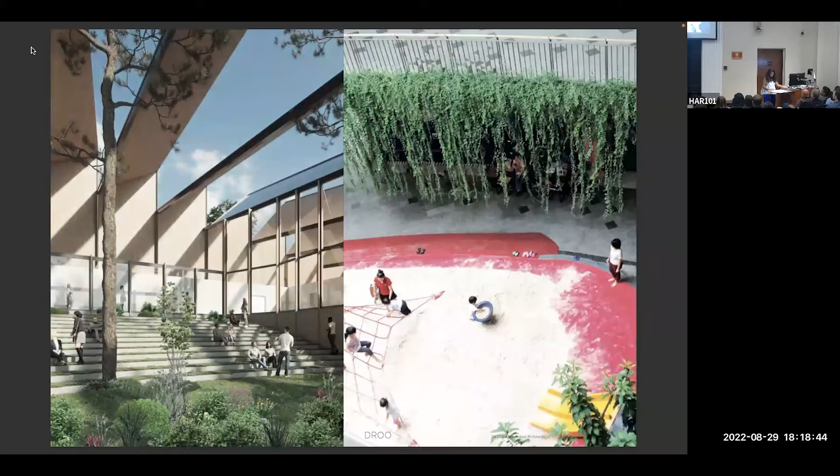What drives us is a critical pursuit of a shared cultural contribution to produce work which innovates, is intrinsically participative in the narrative arc of the history of a place, and history full stop. There are themes which resurface: cultural referencing, spatial and typological economy of means, material research, a fascination for the thickness of walls and envelopes, and a process of co-authoring. But no two projects follow the same route.

Almost all of our work is in cities, and somehow most of it is in complex or contentious situations, a sort of creative friction. Cities which are oscillating between rapid change and preservation, those which are struggling to house their growing populations, and are characterized by both extreme wealth and extreme poverty, sometimes only streets apart, sometimes within the same buildings.

Cities where often the hard truths are wrapped in multiple layers of relative truths at the scale of a handful of streets, between neighbors and communities, between households and families, between the powers of commercial growth and the history of a place. And it is through the subjective truths that we engage with the hard ones. The ugly plan is an analogy for a project which critically synthesizes the conflicting needs of context, but acts beyond circumstance.

This is an ugly plan. This square, the Campiello Morosini, is an ugly plan shaped by its relativism. It is more than one square. It has been co-authored through time by accumulated conditions. Each intervention had its own identity. Every gesture was strong and important, and yet each gesture worked in coherence with its predecessor, like a chess game.

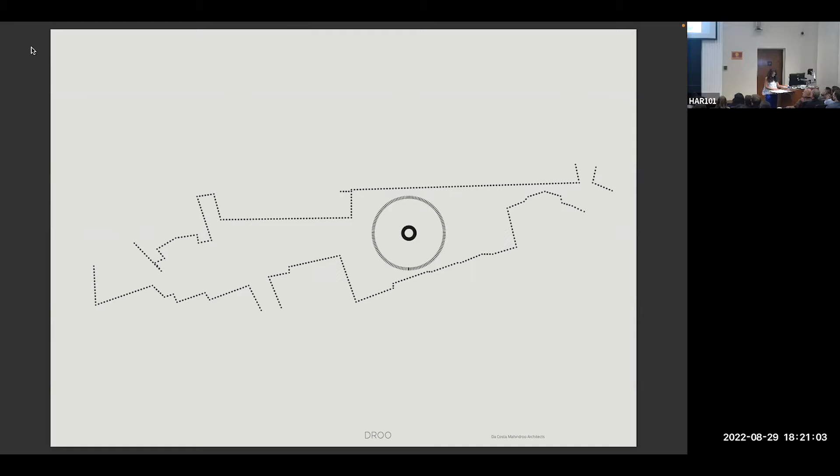It is many versions of itself, depending on which vantage point it is experienced from, and more importantly, it is whole and extraordinary at every scale of experience. It is the ugly that we endeavor to in our work. Projects which can't be isolated from their intangible or physical context, but it's not to be awkward. It's because engaging with the strata that make up the cities that we've been working in, it is near impossible to create an absolute or autonomous work. All of our work is a conceptual point of departure, which remains open to its own multiplicities.

Students, like many of you, aren't a simple social category. We see them as complex, diverse individuals who have their own quirks and some baggage. Despite growing financial challenges, we increasingly see students breaking away from the linear timelines of education and then employment to pursue creative endeavors during their studies. And so more than a test bed, we saw that student housing was a space to nurture these opportunities, to try, test, and accept to fail within the comfort of your home. An ecosystem of reuse, co-op employment, associative activism, NGOs, or even small businesses.

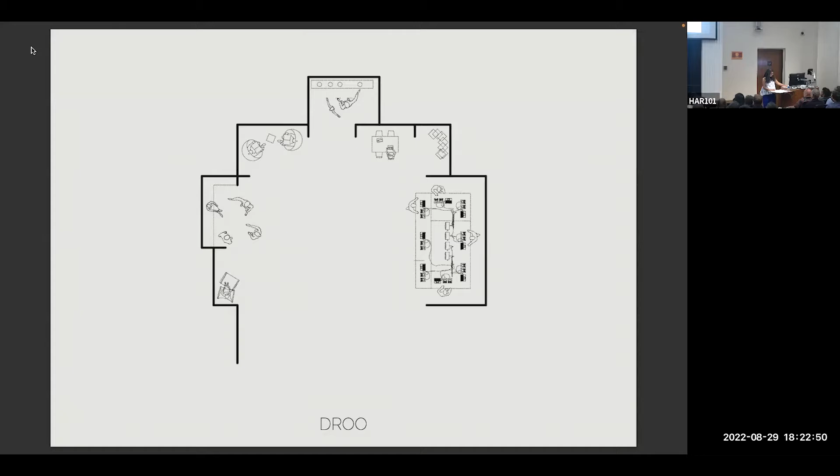Ideas are often developed in the corners of a room, in the spaces which allow for the improbable encounter of the extrovert and the introvert, where an experiment can remain undisturbed for a number of days or even months. Ideas build up in the recesses, in the corridors or thresholds, and gather informally over time. There is a circular economy to students moving through housing year after year. They hand down old tech, bike parts, clothing, furniture, and share knowledge.

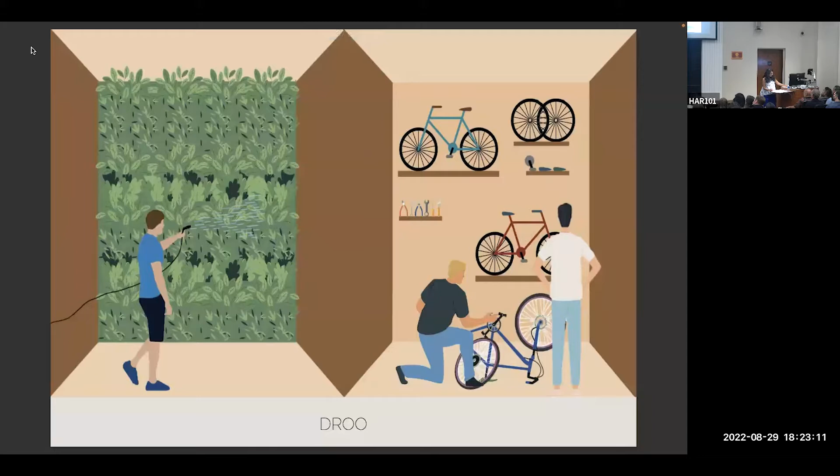We saw the common space as a large market hall of individual alcoves to conceive, make, create, and display. A bike repair shop or a co-op fruit and veg market, maker spaces for shared classes and learning, an articulated frame around student-run projects. The alcove exists as a threshold condition between the communal and the private, equally applicable to the market as it is to the apartment.

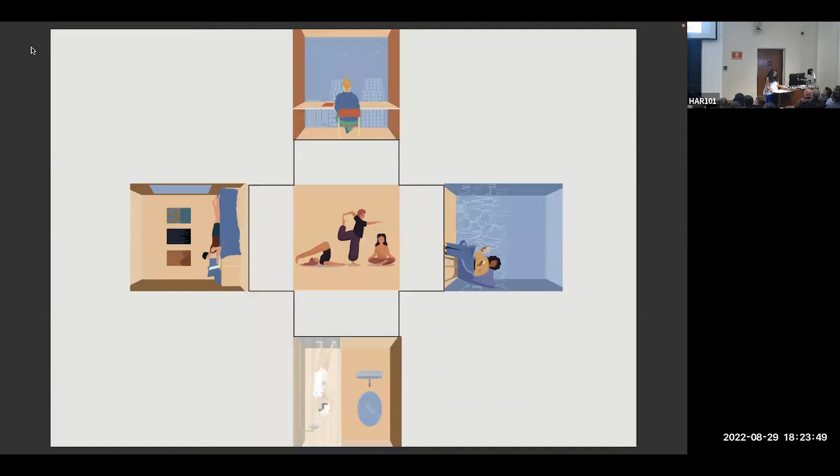The brief required apartments to have a 13 square metre room with an ensuite, or 140 square feet. We envisaged 13 square metres made of personal nooks for individual purposes, a space of one's own, alcoves which foster the freedom to change and adapt, to create more undefined space which allows you to think, stretch, dance, sprawl, and create. Malleable in proportion, these rooms aggregate as modules, pooling spaces to gently nudge a sense of communality.

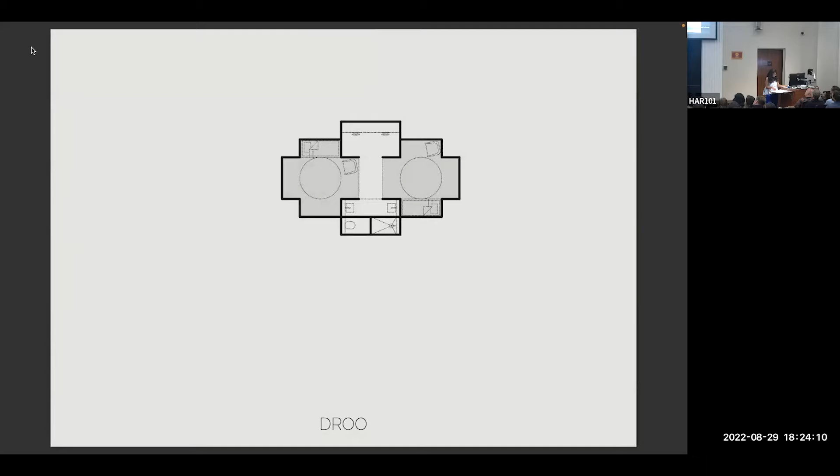Modules cluster to form buffer space, an inclusive space for people with different social skills, offering adaptability, informality, and inclusion. Creating an apartment that offers rooms within rooms, alcoves, nodes, and knuckles of opportunity. Spaces which foster habits which affect systemic changes, sharing of goods, prioritizing well-being and mental health. As walls thicken to meet the highest sustainability standards for passive design, we often explore the opportunities this depth presents in a number of our projects, which takes me to Paintworks.

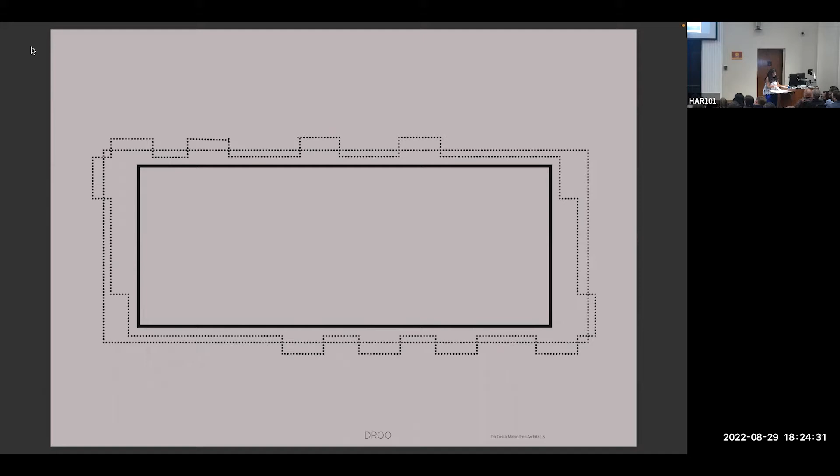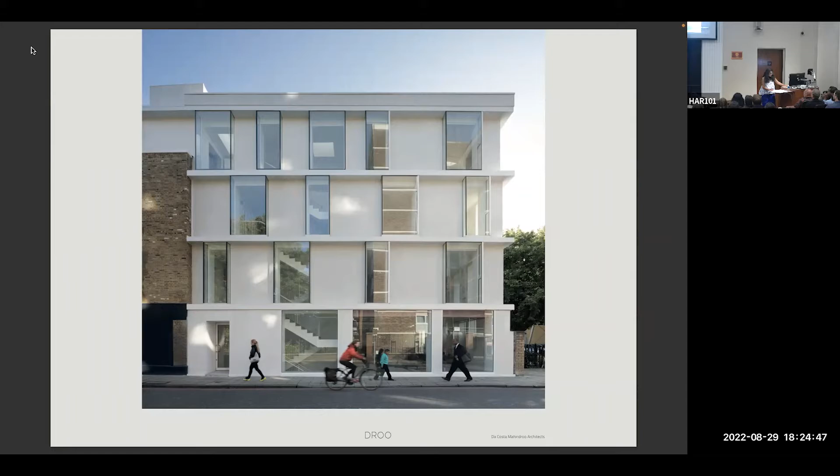Paintworks instrumentalized its context and a series of commercial accidents through robust opportunism to create help to buy housing that goes beyond the metric needs of development. The site was an existing warehouse with a car park behind it, something that I've seen quite a bit of here in LA as well.

The existing building needed an extension to be viable, and the question was which way: up, down, sideways into the car park. Effectively, for the developer, it was all of the above, and therefore it forced us into a project where we were negotiating with multiple uses at a compact scale, but also multiple neighbours, and this very pretty garden, which we borrowed from Hackney College. Our work became a game of who came first.

A quick word on planning permits in the UK. Planning in the UK is based on time and precedence. There is a rule book, a rough code, but most of it is a negotiation. Effectively, the game is to acquire rights that set precedents in terms of space, or use. This logic is combined with notions of light and privacy, but I'll come back to that later.

When you place even one window across this boundary here, we're effectively carving into the value of our neighbours' property, which means that we're taking away space that they can develop in the future. Why is this important? Because in absolute terms, this facade would have been entirely blind. However, for the benefit of the residents, we negotiated to limit Hackney College's right to future development by putting windows along this planted car park.

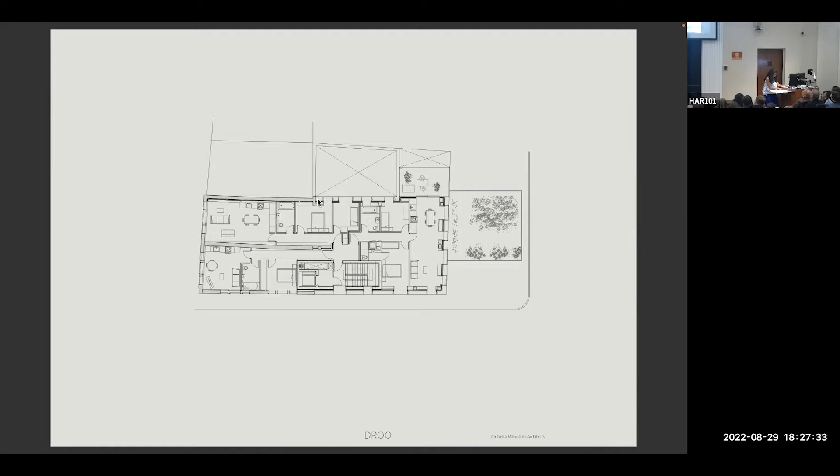Halfway through construction, the supermarket pulled out of their tenancy. This happens all the time. They had found a better deal elsewhere. However, the core was now built in its particular location with a lift shaft and windows already in place on the street. This commercial accident resulted in a particular communal gain with a well-lit and airy circulation space for housing, which now doubles as communal space where residents occasionally gather.

The result is a communal area which benefits residents and also frames the surrounding city, providing vistas into the gardens of the neighbouring social housing block, a strategic access to borrowed green. The challenge to an evolving and intangible volume is that the architectonics tend to emerge at another scale, usually a smaller scale, and in most of our work in housing, this is in the thickness of the facade or in the windows, the threshold that we delight the most in designing.

The proximity of all of the neighbouring properties meant that there was an inevitability of privacy issues to address. In order to address passive design, we increasingly see building envelopes become thicker with double insulation packages, absorbing structure, MEP, services, fire curtains, barriers, and blinds. The thickness presented an opportunity to create a double-layered internal space within the windows.

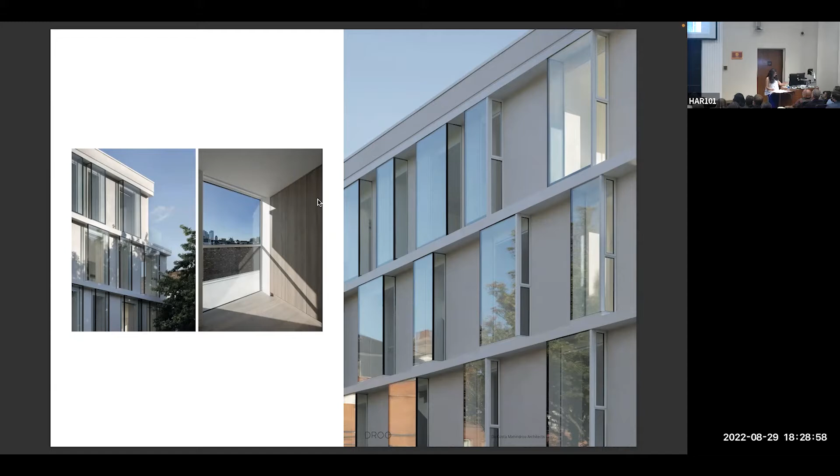The large-scale slab-to-slab windows let in light and frame dramatic views across the city. The alcove that they create, which they extend to the slab boundary, creates a sense of privacy and actually offsets some of the heat gain. The windows hang like picture boxes onto the cinema that is the city, whilst creating an intimate and individual scale of the experience within the alcove.

The very idea of time and continuity informs a lot of our work and a lot of our efforts to source and reuse materials. The rain screen is made of a recycled stone and resin compound with concrete building waste mixed in. It has a crumpled paper texture as a nod to the history of the building as the Paintworks, which was a former artist supplies warehouse.

We've been working on building waste composites and terrazzos for almost 8 years now, but they present significant challenges in getting approvals for fire certification for multi-residential work. And so in this case, we had to use building waste from another site, which was unfortunate, but nevertheless.

The ugly plan is about an intellectual flexibility, but also opportunism and some convictions, the compass I was talking about earlier. We were required to maintain utmost flexibility because the client flip-flopped on various potential tenants. At any given time, we were working on almost 4 concurrent planning applications alongside construction, which could have been a 3-story building or a 5-story building.

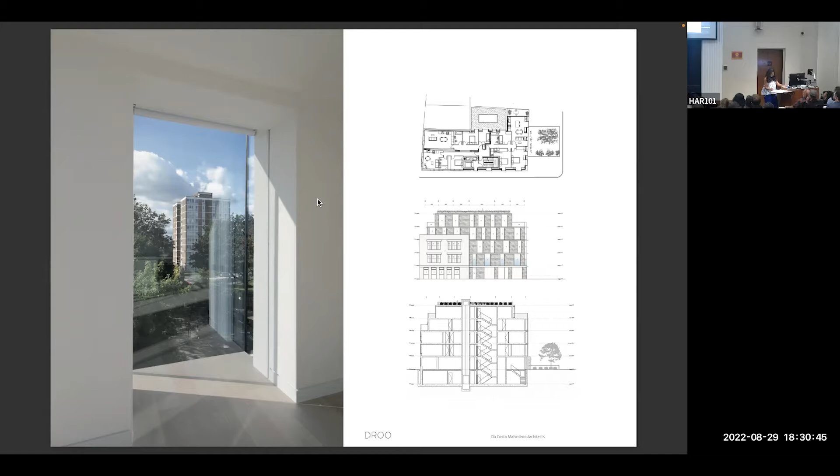The project was delivered a few years ago, and we were called 3 months ago because the planning regulations are changing again, and they would like us to extend our own work. The ugly plan is a metaphor for a time-based negotiation of contradictory and sometimes frictious forces. The often chaotic process of co-authoring, which comes from many parameters and multiple stakeholders. Our work has to depart from a conceptual base which is strong enough to hold the project's identity, but be flexible enough to evolve with this chaos.

In the other corner of London, in literally every aspect, is Castle Lane. About 300 metres from Buckingham Palace, Castle Lane is home to some of the wealthiest homes in London. This conservative pocket is extremely resistant to new development. This is proper NIMBY territory. Our clients wanted an urban approach which would show both sensitivity and innovation.

The block navigates about 3 streets and a neighbouring pub. On one side, it interfaces mansion blocks, which are effectively 5-story apartment buildings, and on the other, 3-story Victorian terrace houses. The number of complaint letters were in the 2 digits, which for something that's a reasonably small development is actually a lot of vocal neighbours and a lot of heightened attention from the local authorities.

Permitting this site took 2.5 years. I was kind of hoping for dramatic effect at that stage, but I realized here in LA, that's what it takes to get a house through planning.

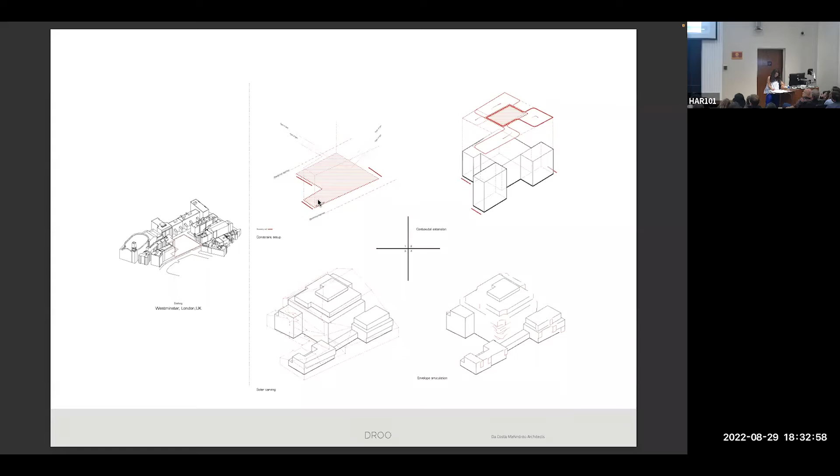And alongside this, there is a sort of ambiguous, unscripted notion of privacy, which is just something to be understood about the British. Every design decision is an iterative negotiation with the city, various stakeholders, and with ourselves as designers. The result is this sort of in and out carving of volume.

So this gap at the back here of the lower scale comes from a covenant which was agreed by this neighbor and this site about 100 years ago, and it's been written into a contract, which means that it will never go away, and so we had to sculpt around it. When we carved in other parts of the site, it was because of basement windows on the other side, but it was something that we could purchase or not. Everything comes down a little bit to how well you get along with your neighbors. And you can see the way the volumes had to sculpt in and out to deal with that.

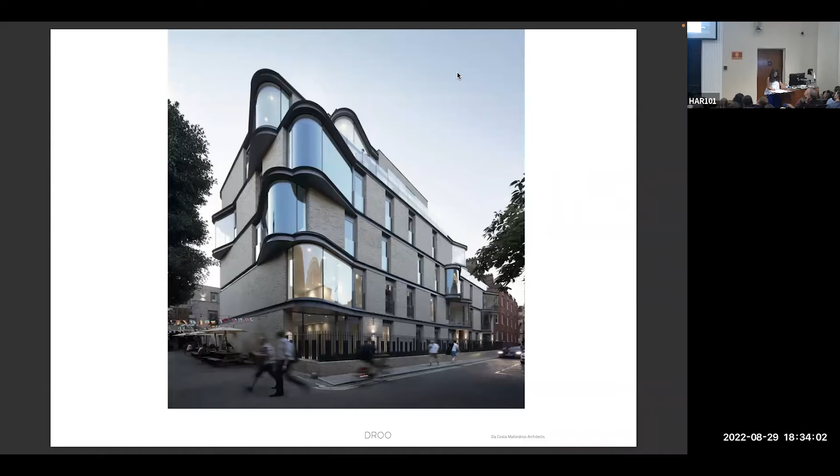So our approach was to absorb that complexity into a unique typology, which was drawn from its context. A space that inhabits the thickness of the facade, a sort of hovering volume. Halfway through, there is little in the way of scale which is coherent. However, the most consistent features across both streets were the traditional English bay windows, as you can see here. So we sort of immersed ourselves in the context by rewriting the formal grammar of the surrounding bays.

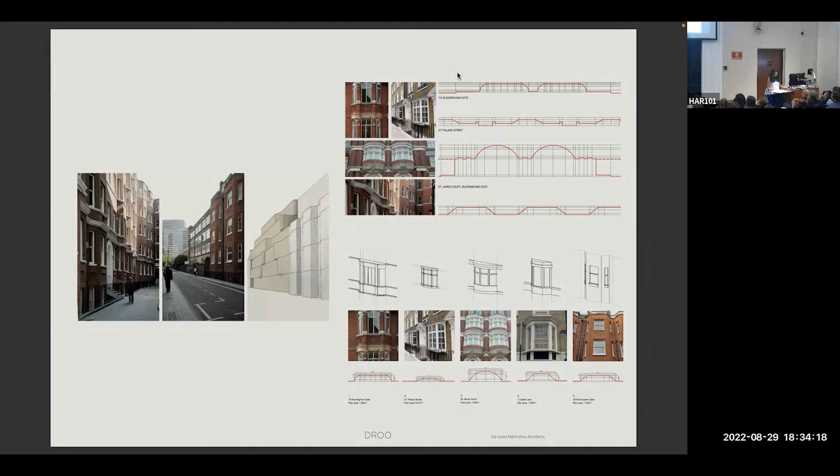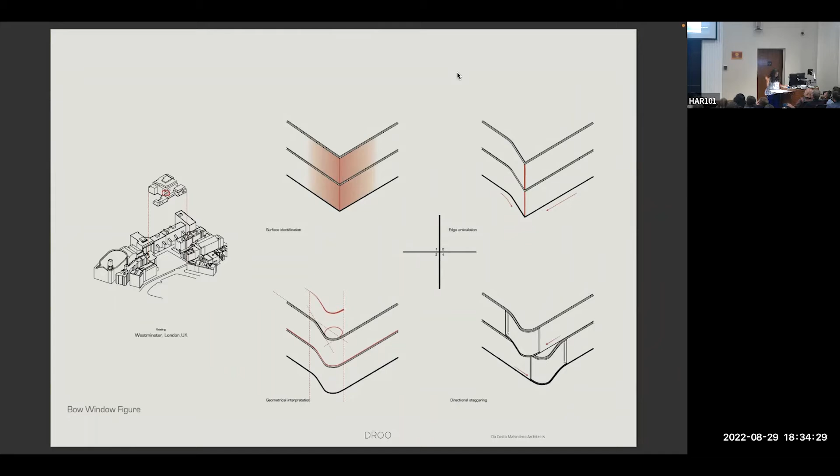We studied both form and shape, and this became a point of departure to design a window typology, which was flexible enough to slip and shift shape and negotiate the many urban interfaces in an innovative way. Beyond the referential form, we wanted to create something that was a unique spatial experience as well, and which sort of augments the very idea of a window.

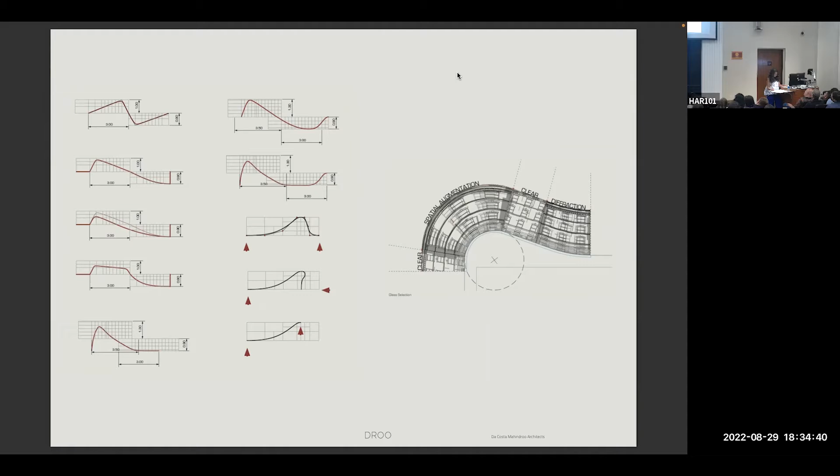So this typology explores the window's spatial thickness and also suspends it slightly outside the volume of the building so that you have this impression that you're hovering above the street. We worked extensively with Arup's Advanced Facades Lab to study the window bays on how to localize and hide distortion.

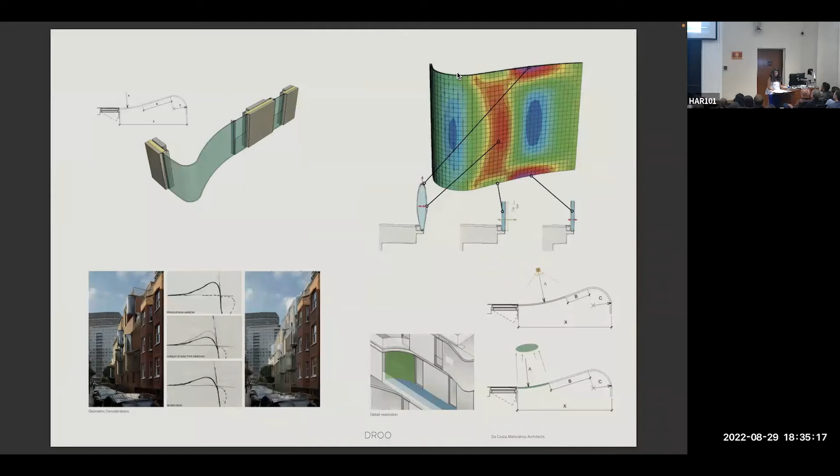There are moments where the curve contracts and others where the distortion expands to assist in increasing privacy. How to manage heat and light diffraction so that we wouldn't melt cars with the windows. That happened in London some years ago. And we also studied how to create a counterform which would address the convex areas where we had to carve out volumes to respond to the localized planning conditions.

This became the definition of the aesthetic for the townhouses, which were the smaller buildings and a series of smaller individual homes which interface the Victorian terraces. We also carried out an extensive amount of research into terrazzo composites for this site, using a mix of materials from building roof tiles, bricks and cement-based building waste. The composites, as you can see in some of the colors over there, produced a series of panelized materials which were really interesting.

However, for reasons of certification, we were unable to use those for this particular project, but we studied the brickwork in the neighboring context extensively to develop those panels. We're actually now using them on some smaller domestic projects because that's less complicated.

So just a little input here. I think we aren't always designing for the momentary dramas, although it might seem like that when you're dealing with neighbors all the time and you have to come up with ideas to respond to that. But we do navigate them, and our work has to be innovative beyond the kind of drama that you deal with on a daily basis. And so our objective is to create a sort of legacy through that built work, the kind of legacy that the existing bays had left in the fabric of the city. The research we do on one project often gets carried over to another.

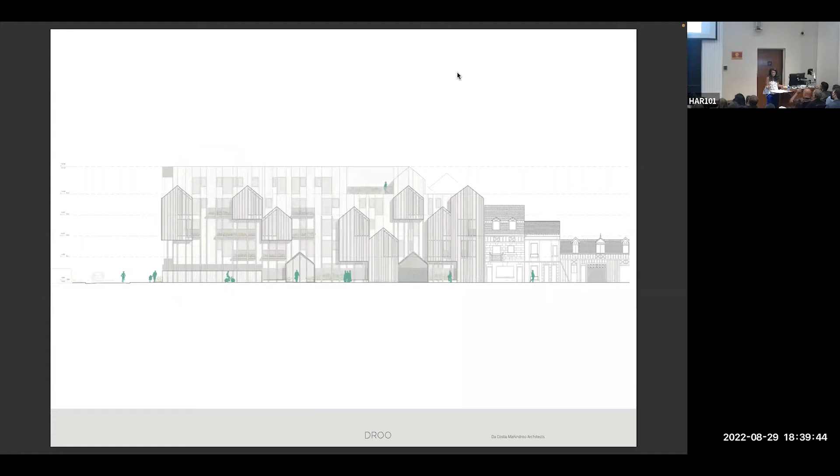But the problem with this homogeneity is that it ghettoizes social housing against the heterogeneity of private housing. And so we wanted to make sure that the units could not be told apart. The sort of equity versus equality argument. We wanted to create a sense of the individual within the collective, and based on another thick facade, we wanted to create a sense of I live here, the treehouse.

The treehouse volumes move with the larger and smaller scales of the surrounding urban context, engaging with the site's history, its imbricated scales, and its coherence as a whole. Once again, the volumes of the surrounding context require certain distances from boundaries, but now that we are in France, these rules are absolute. There's no negotiating, it's just black and white. The project is made of a street building and a courtyard building. Units are mixed across both buildings and have terraces or winter gardens which project out along either the southern or northern facades, depending on which way they've been staggered.

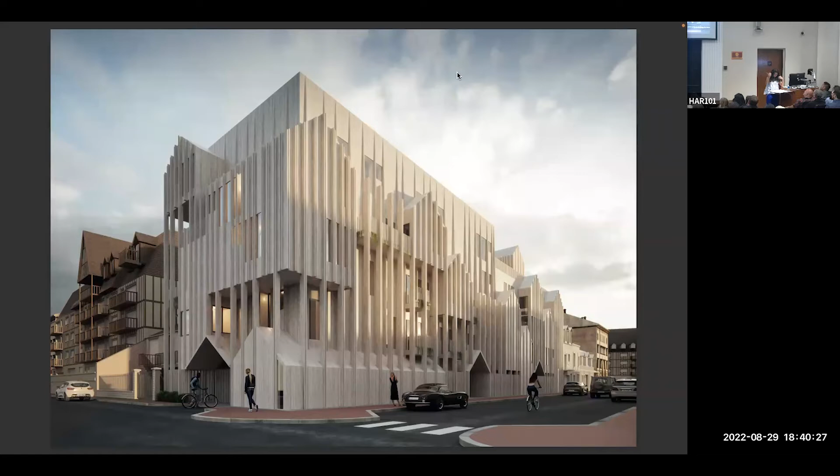They are connected by an internal common bridge, which offsets the cost of not building an additional core. Saving that money allows us to create an unexpected and meaningful space which can be shared by everyone. It sort of creates a covered veranda, which provides protected space to the children's playground, but also creates a bridge

with an extra wide corridor space, which allows for well-lit and ventilated common spaces, which we've found to be some of the core needs of social housing, because it allows communities to foster, to gather, to kind of form communities, because people can speak with each other in a safe space.

The T-shaped plan creates a series of residual gardens. Can you see that okay?

Or it's loading. The T-shaped plan creates a series of residual gardens. So those forms effectively come from the urban conditions. The courtyard gardens between residents are designed with their own series of programs. So you have the central garden, which is kind of more for picnicking.

The children's playground is a crucial one because it creates a node almost externally, which allows for both social and private housing to share that space. And as we found in a lot of research, children are one of the best places for adults to socialize around a playground and to break down social barriers about one person who's living in one set of housing versus another. And then there are productive gardens, which are for vegetable patches and individual private gardens.

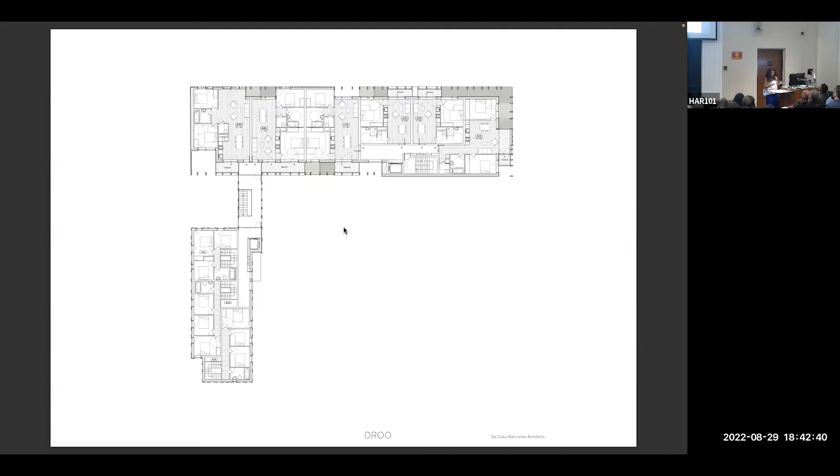That space is where we seek to find a balance between a highly defined and expected program, and the spaces that are looser and where more unexpected events can occur. The living tube, which I'll describe here, is effectively this clear span which creates a transversal space between north and south, and allows for passive ventilation of the apartments.

And that space is only made possible because we've compressed a lot of the surface areas, so bathrooms and kitchens, etc., into joinery or tighter walls, which work a lot harder. I think as demonstrated in our student housing proposal, which I explained earlier, there are two typologies of space, those which are engineered through prescriptive norms and standards, bathrooms, kitchens, wardrobes, which suit the size of a hanger, or rooms which suit the size of a bed.

And then there are spaces of freedom, as we like to call them, corners, slightly oversized corridors, alcoves where a desk can be placed, which empower people with a sense of choice. And that choice we've found to be a measure of quality. It provides people with a sort of indirect sense of self-worth in their homes.

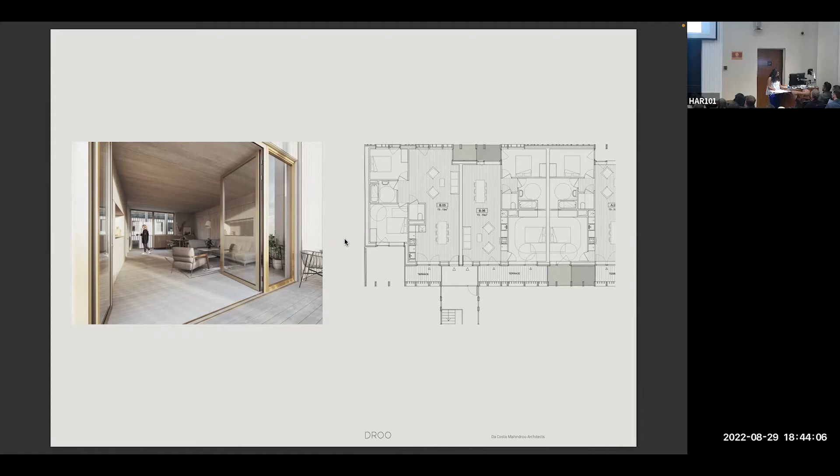These project along the north and south, which provide an additional sense of light conditions depending on which way you're facing. And the thickness provides a level of protection to the internal spaces from wind and wind-driven rain and coastal storms. The building is designed entirely to be low carbon, ethically sourced CLT construction.

It's clad in marine treated burnt accoya with a paint stain to increase its durability and allow for modular offsite construction. I think the idea was to create a sense of forms which would be based on the materiality and the typological forms that are driven by climate and context at the same time.

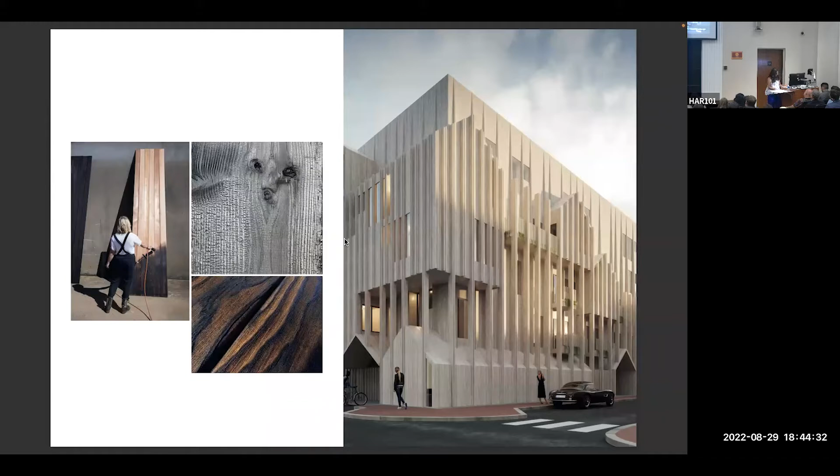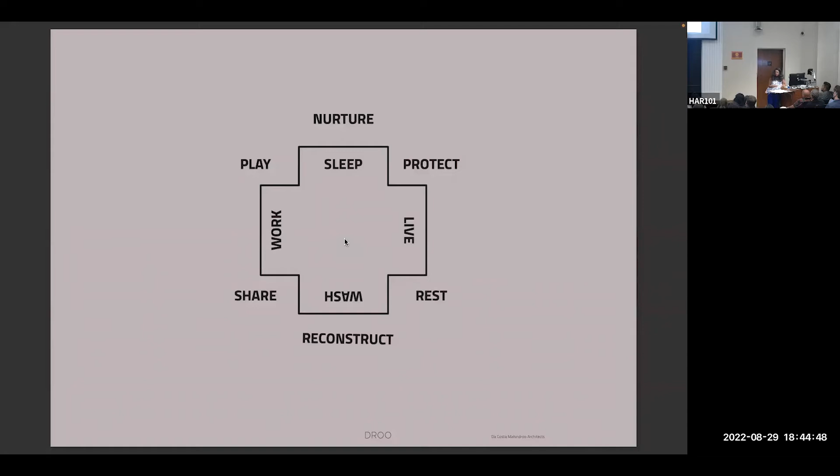But not all projects come with context that is tangible, hard boundaries, neighbors, or planning processes. Over the next few, I will talk about how the philosophy of the ugly plan translates into architectural processes, which are defined by more intangible contexts. So we're presently working with a charity in Australia for emergency relief housing for at-risk single-parent families.

In partnership with technology company Six Sides and a major hardware retailer, Bunnings, we are designing tilt-up passive homes for a demanding subject in a very demanding climate. The site is presently a trailer park. It's in a high humidity rainforest where the biggest problem is the cost of getting water, heat and sanitation out to each house. The conditions aren't conducive to an ugly plan by virtue of an open site.

The question came like, what does a single parent family need? Usually another parent or another adult who can help them look after their child from time to time, or can at least be watching them for moments. And so for us, what seemed most important was to create typologies that would stick together to create a sense of community. Minimal doesn't necessarily have to be a compressed way of designing expected spaces.

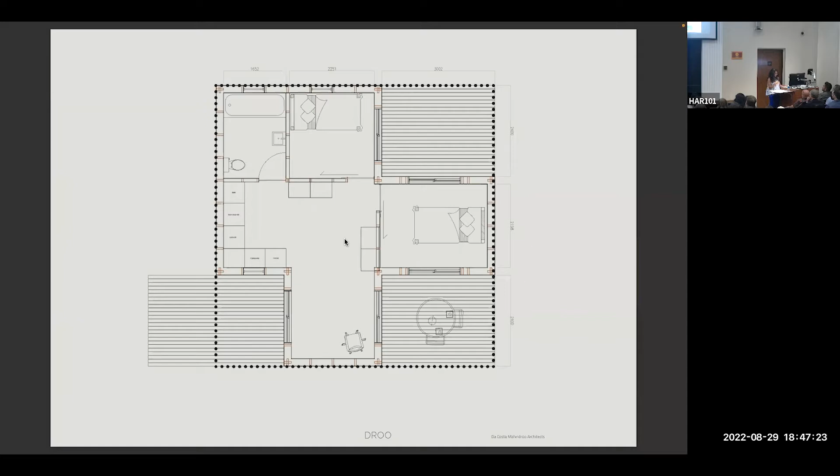And that allows for a parent who might be fairly distressed to be able to easily access or see their child without necessarily having to be in the same space all the time. Our base model was for 36 square meters. And so we created a series of external decks which help ventilate the units. All of the windows open onto the decks only, which creates a sense of privacy. And because the decks are covered, they effectively become external rooms.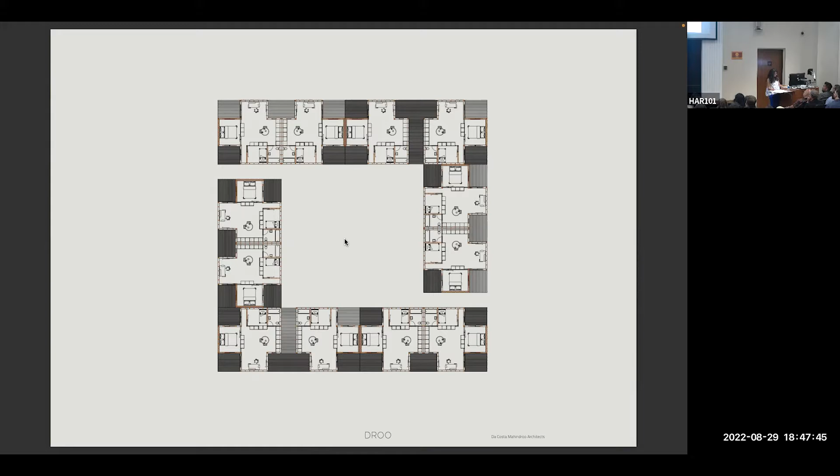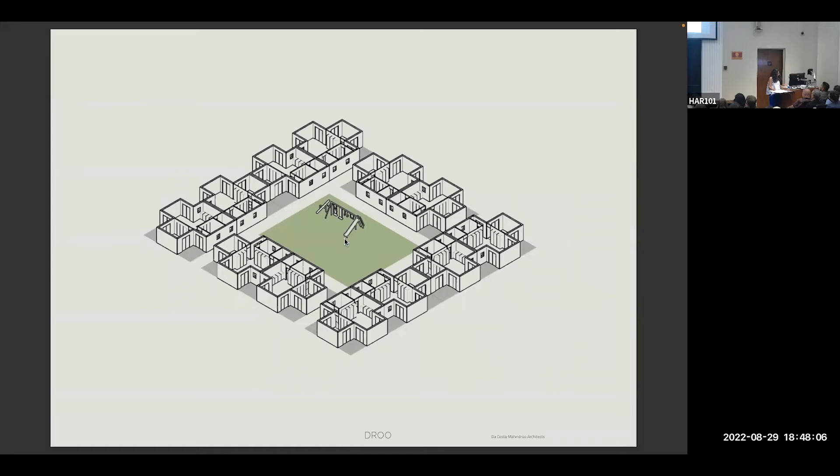But sometimes that friction of context is in its scale. Or a matter of time. Marian Place is a master plan proposal for that perfectly awkward scale between architecture and urbanism. It's too big to be a building and too small to be a city. It's where we offer mass, typology, structure, and have to build difference into our own work. We have to build in time, basically, to create an articulated sense of immediate urbanity, which appears like it was naturally aggregated over time.

The site is a decommissioned British gas brownfield in Bethnal Green. It does not have any street access. It's effectively an enclave. And so we had to cut streets through it from the light industry that surrounds it. The program is for 350 homes, a library, a daycare centre, urban farm, sports facilities, the usual that goes with 350 homes. The project takes a base volume of 5 stories across a cluster of buildings to create public squares to insert civic onto the ground plane.

The upper floors are offset to create new external spaces across the upper stories, a process of returning that borrowed ground. The volumes are twisted and offset to achieve the required FAR, but that twisting echoes the silos of the site's history. It animates the volumes and frees up sunlight into the courtyard based on the various orientations of the gardens. The result is multiple green spaces and new gardens, which are at a more accessible level for higher placed units. And it interfaces with the various scales of development on the surrounding sites as well. The ground plane courtyards are designed in different ways depending on the interface of what they're connecting to. So in some cases that's housing, in others that's light industry, which needed a different kind of design resolution.

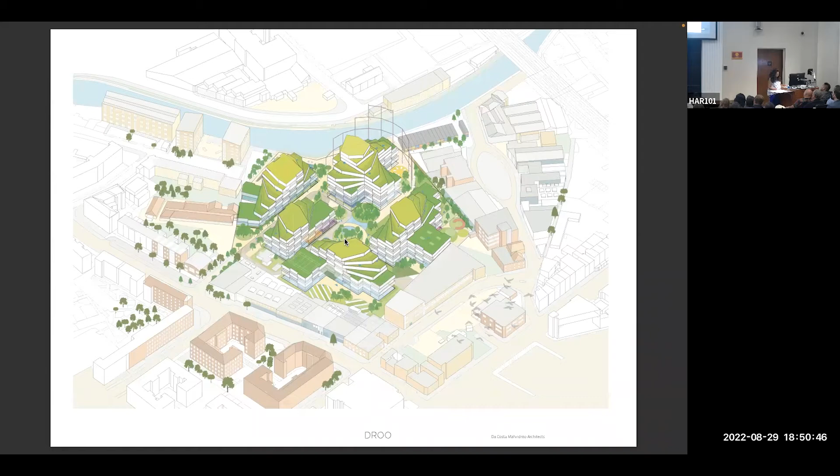It's a unique process for us to relinquish control on how much we define and design, knowing when to stop and to create space for a different set of authors to join us. And so part of that diagram, that twisting volume, was to imbue a sense of architecture into the massing so that it kind of negotiated that scale. And it's this particular scale between architecture and urbanism that is the set of frictions which define the ugly here for us.

Sometimes, very rarely, that friction is an absence. A program and a site, sure, but a condition which is completely alien to our sensibilities. That friction is a significant lack of urban quality, wherein a site was meant to be experienced only from a vehicle, and we have to create a sense of civic within it. So this site is in Seoul. It's stranded between a 6-lane highway, towers of housing blocks which sit like islands in a sea of unscaped terrain, a golf course, and a building which is partially a kindergarten and partially a school to one side.

There's also a campus somewhere in the distance. Everything is very far apart and with almost no connection. So there's a sense of time to that one too.

Our proposal for the Songdo Public Library mediates that sudden transition from the flatness of the low-lying ground plane with the intense verticality of the towers. The volume drags up the landscape, and we positioned the sculptural side to the perimeter so that that transition is designed to be experienced from a vehicle. It creates a centralized public space to the interior in the form of an urban park and a water reservoir.

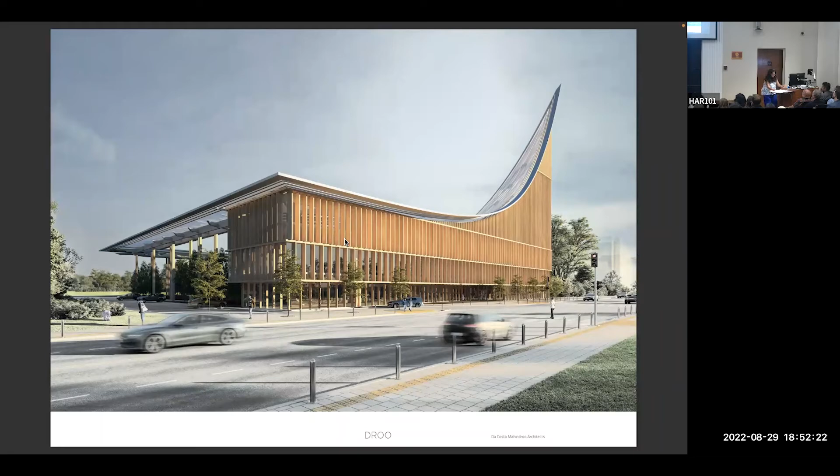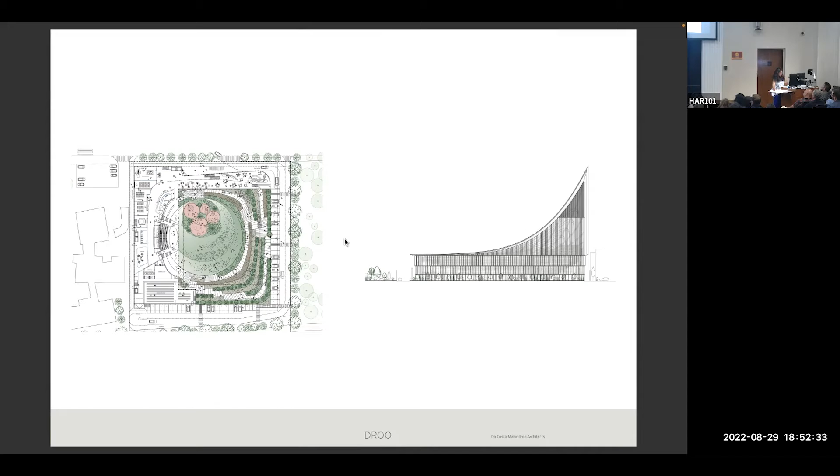The library is a series, sorry, these drawings are going to take a bit of time to load. It's a series of stepped plans, stepped contours, which effectively house all of the shelves for the library and create the auditorium. Within each plan, there are a series of subspaces or more intimate programs, reading corners, study desks, and shelves, layering complexity into the spaces of those individual contours.

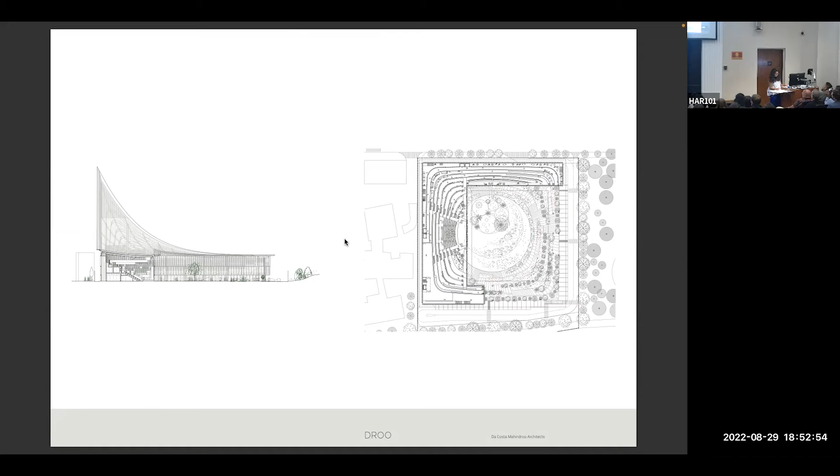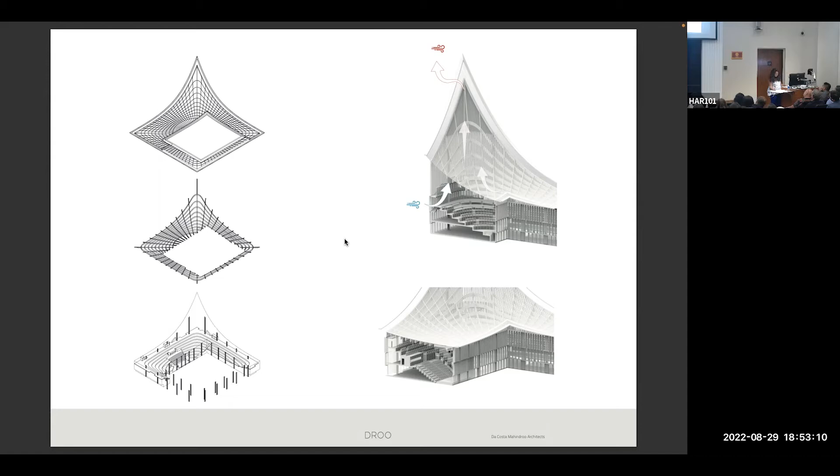The journey through the library is resolved through a series of plates, and the balustrades are created by the shelves at each level, which creates that sense of density. The building uses its shape to also create a naturally ventilated wind chimney, which pushes up the warm air through the building and explains how the volume raises up to one corner. It's designed in large span CLT, and the roof is also a catchment for water, which is transferred into the reservoir below the children's playground, which then irrigates the park.

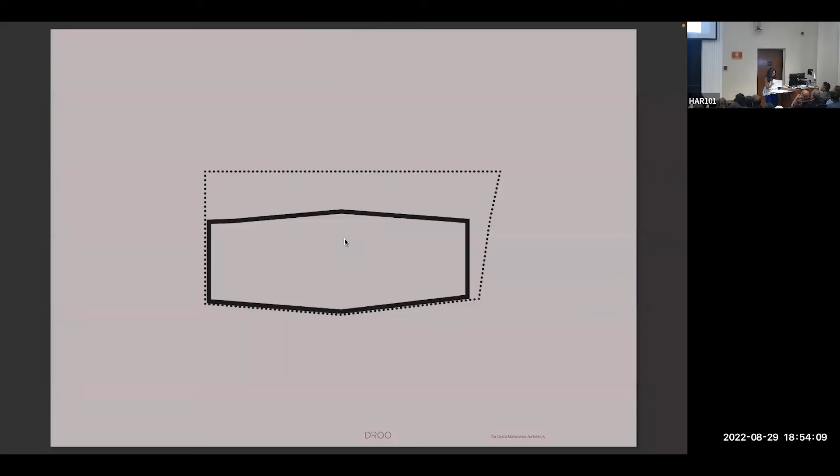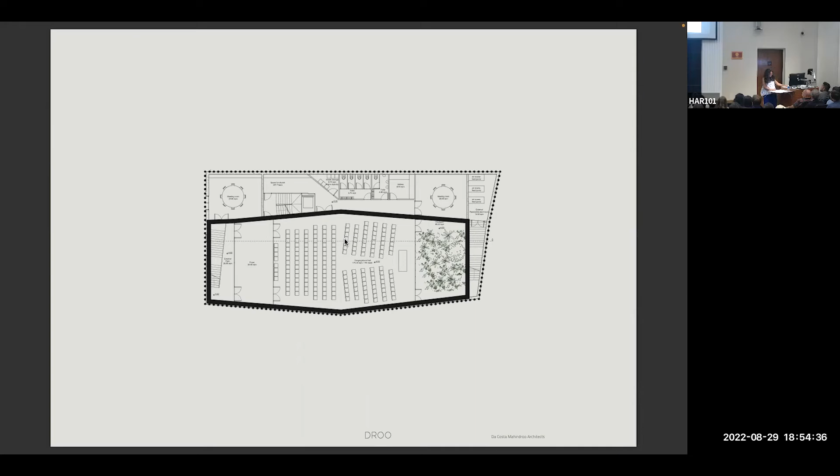This plan is of a church that we're currently working on, which is presently under construction for the Caribbean community in North London. I would love to say that this plan was a prominent building that I could show you lovely renders of, but this church is in a basement. It's in a basement because of the symbiotic needs of the church, the inherited civic use of the site, which was championed by local authorities, and the commercial pressures to densify the site.

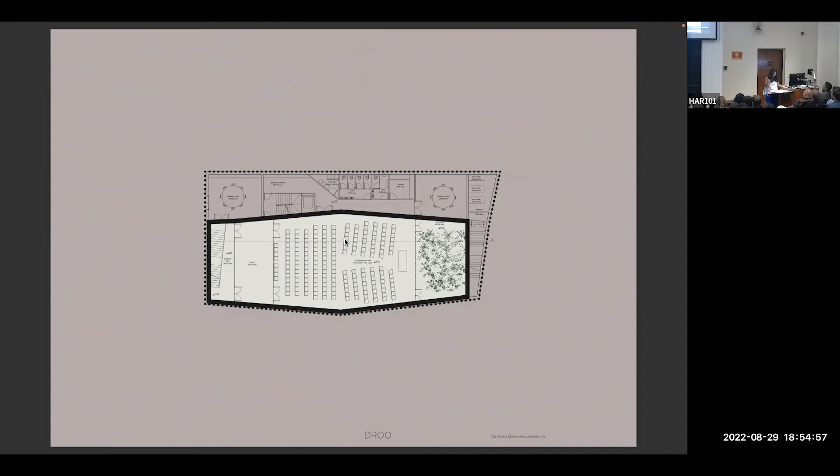Sometimes the only way to keep civic programs within the communities in which they exist is to squeeze them into a layer cake of other programs which ensure mutual viability and mutual architectural benefit. I won't show you other drawings. The residences above look into the church's gardens. So guess where this youth club is? No one's paying attention. In a basement too.

London Youth is a charity which supports youth clubs all over the city. They are effectively facing some challenges and have started selling their sites because of reasons of care and maintenance. And therefore, they have come up with quite a strategic strategy to secure their future spaces through legal agreements and planning permits, which ensure that they are guaranteed rent-controlled space as a part of the permitting and sale agreement.

Now, the site in question is in Dalston. You might recognize it. The site was effectively a windowless, unheated portal frame shed. And in the completed project, it will be a windowless, heated basement. However, it's going to be designed to the requirements of the youth club. So today, this site is effectively a layer cake in construction. You can see here in progress. It's a gymnasium, a community youth club under Makers Studios, and then with Help to Buy housing above.

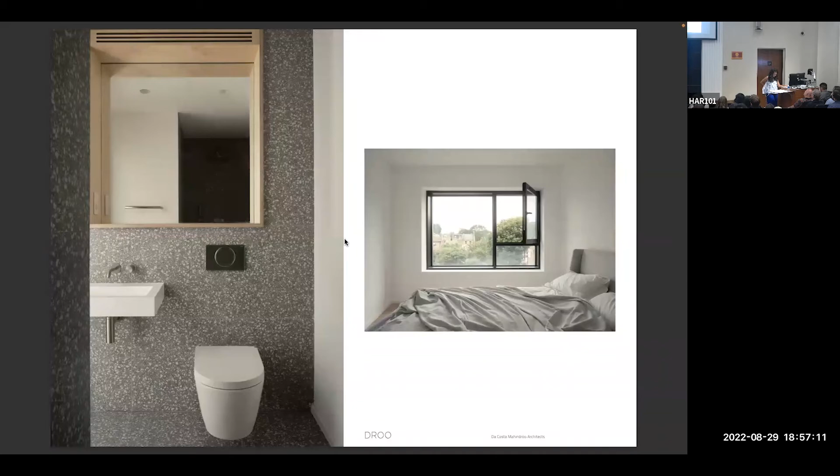The corner site is wedged between a neighborhood pub and a series of terrace houses, which are to Cecilia Street on the other side. In order to address the transition in scale between streets, we offset the volumes of the larger footprint through a series of loggias, which you can see here, or internalized balconies, which address the varying alignments surrounding it. The result is a series of articulated volumes with a crafted textured brickwork to uplift the very rough context, some might argue. A process of squeezing architecture out of the tightest budgets, and above all, to provide quality homes with a minimum of means, something that we often are challenged with.

The charity would not have been able to remain in its place without the housing program. This process of retaining a civic use as an offset gain from commercial pressure is a negotiation that we're often dealing with. One we're often faced with in many of our larger retrofit projects, which I'll talk about next, where often this is the only way to stop a larger listed building from becoming derelict.

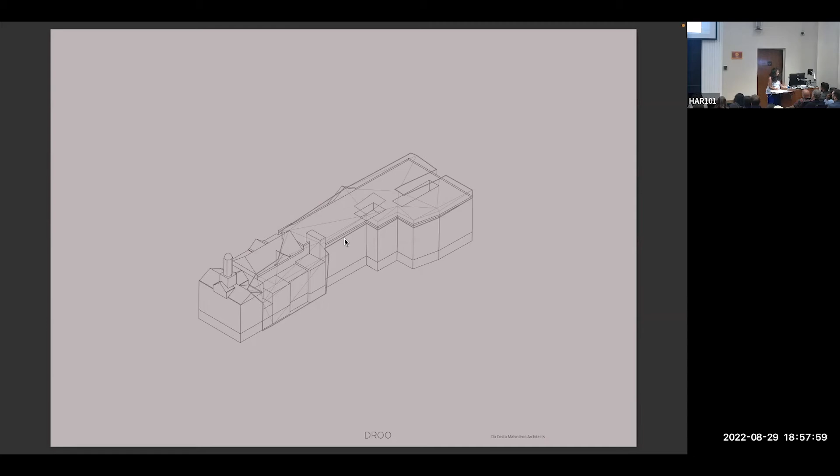So many of our larger retrofit projects are subject to a process of stitching together buildings and sometimes separating them for the coherent or logistic movement of multiple clients and operators inside one larger building. The Town Hall Hotel is one such story of multiple operations under one roof. But we like to think of it as multiple stories of past and present, where the building presents itself differently according to your vantage point.

For most, the story of a building that was celebrated, lost, and then regained its pride. Here are pictures of the grand opening that we found when we started doing the archival research. It's a story of the London Borough of Bethnal Green, which was a fairly working class neighborhood, that had first opened their town hall. Following the consolidation of a number of London boroughs in the 1960s for cost and administrative reasons, the city's town halls and other public buildings became derelict because they could not afford to maintain them effectively, and the government decided to begin auctioning their sites.

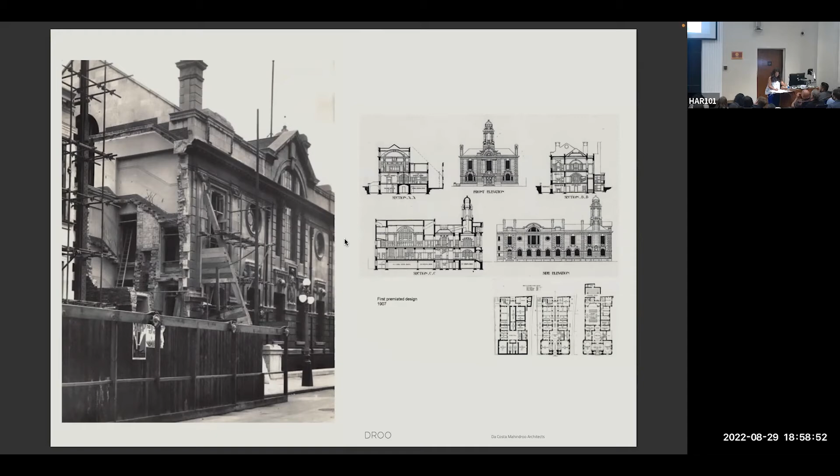The Bethnal Green Town Hall had been a derelict film set for almost 15 years before it was purchased by our client. He was bold enough to buy an extraordinary building which required a behemoth amount of work and money to refurbish in a neighborhood that was kind of rough around the edges at the time. It's quite a bit more gentrified these days, but it was a few too many stops east on the Central Line. The building is entirely listed down to the ventilation grills.

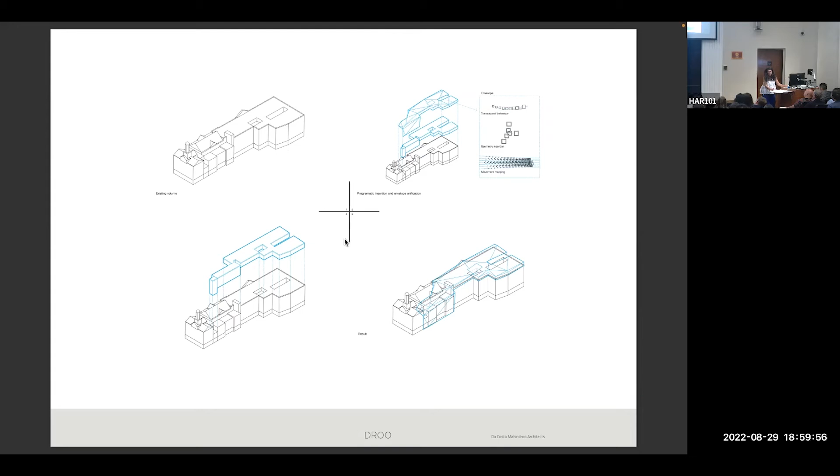In addition to providing the private apartments, the primary challenges were to maintain and use the council chamber and the beautiful meeting rooms as public spaces, which could work independently of the hotel. One part contemporary extension and another restoration, we had to come up with a strategy of reversibility, which would allow us to dialogue between the old and the new in the most sensitive and respectful way, which was innovative. The former users of the building were the planning officials, and a journey which began with a complete refusal of the change of use ended up with their recommendations for the various awards the building was to receive.

The project was engagement through and through, with authorities to explain our abstracted ideas, with local communities to explain our process and listen to their stories, to co-create with them, and with the building's past and its future uses. We poured through archival photos to reinstate parts of the building. The conservation process was crucial to its reinstatement, and our work was both interpreting and adapting to extend the life of the building's existing fabric, but also maintaining its patina and creating a third era of its history. And so we drew on that when we moved into its next chapter.

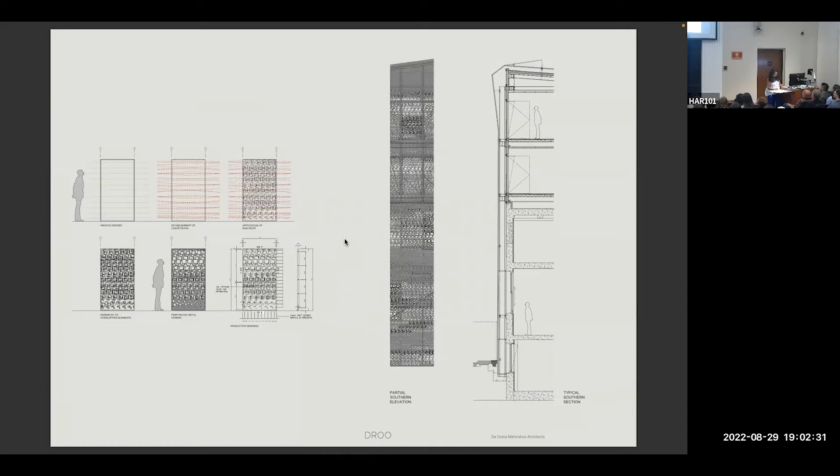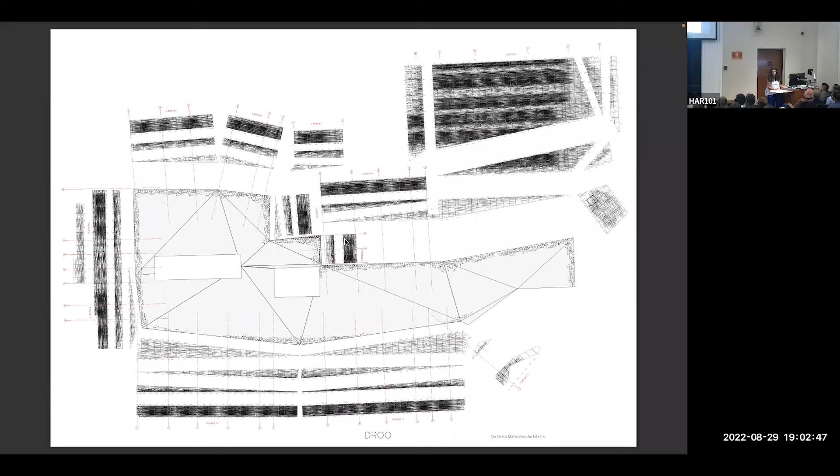And there were sections which were entirely informed by computer-aided design and fabrication. This exercise in digital craft created the most material efficiency and resulted in it being the least point of contention with the contractor. There were so many other things that they struggled with. And also this particular type of method was selected because it allowed us to propose something which was reversible.

It can entirely be removed in the future, and if the building is to be refurbished by another architect or another person in the future, it doesn't impact what was considered the listed character or the listed parts of the building. And it doesn't come with the same permanence that a mineral solution might have. So you can see here parts that have been stitched together with the existing fabric at the back.

Right, and some of the studies which took place to find the right geometries to work with.

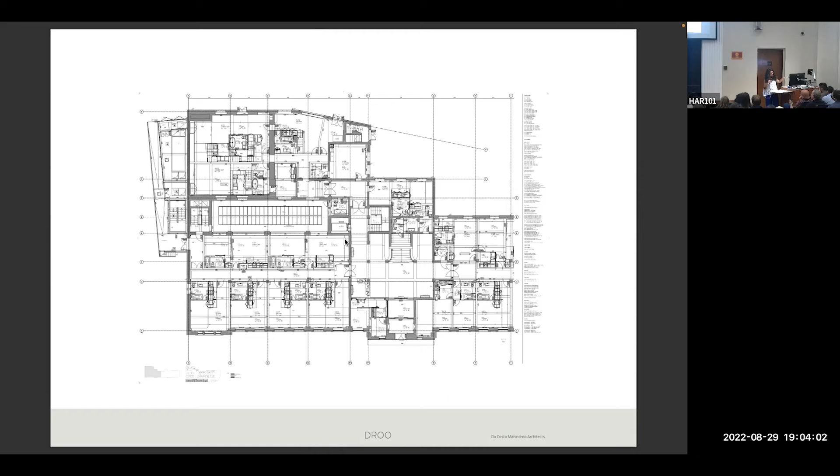Okay, that's loading. So coming back to ugly plans, we love ugly plans. The main administrative halls and the high character rooms had to be logistically organized so that people could move through the building without necessarily interrupting the hotel functions. And a big part of this was actually making sure, like the way that we got the permit was making sure that those rooms were open to the public for a certain amount of time through the month.

In order to deal with many of the high character rooms, we used a sort of spatial furniture typology, which allows us to bring in MEP services, all of the plumbing, the air conditioning, the various individual programs, including kitchens in some cases, that don't touch any walls because those walls are all listed. So all of the skirting boards, the cornices, the windows, everything.

This meant that we were compacting everything that was serviceable to a room into these pods, which float within the high character rooms, as you can see here. And so we make the joinery work really hard. It does lots of things. At the same time, often bathrooms are encased within a room which floats outside of the larger fabric.

In other areas, the work on the interiors was much more to do with just pure refurbishment and considering a new era of the design, so interpreting some of the interiors and finding a new way of translating that into contemporary design.

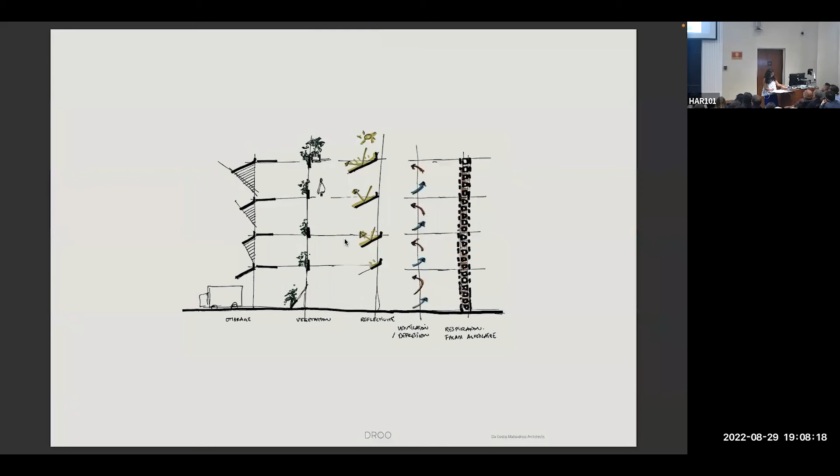Our proposal was to use the existing exoskeleton, once again, a somewhat over-engineered structure, to hang a canopy, a secondary canopy structure made of recycled and extruded terracotta, which folds into the cladding as a planter box to help with the overheating and the urban heat island effect. The recladding improves the thermal performance. All of the windows will also be replaced, and it also provides shade to the south and west facades, improving the heat that the building is dealing with.

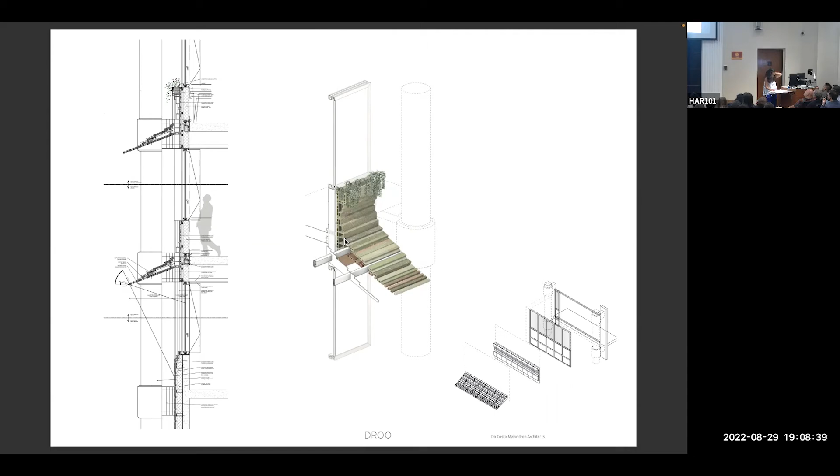This was also an opportunity for us to revisit some of the earlier research that we've been carrying out into circular economies and the reuse of building materials, which went into Castle Lane, as I'd explained earlier. But this time we're working with earth and terracotta and the resulting project. Right, almost there.

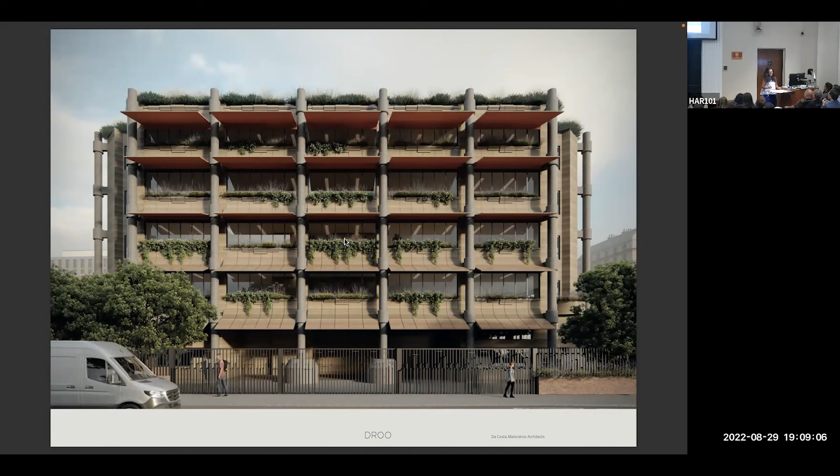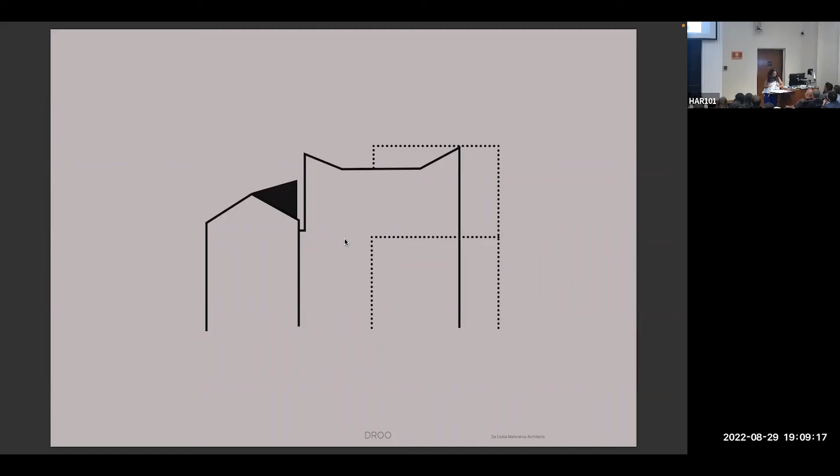So the next project is a story of perseverance. Beyond its particularities in terms of program and reuse, the project is particular for us because we've been working on it for 8 years on and off. It's had several stops and several clients in the making.

Some 8 years ago, we took part in the original bidding process for the sale of the former Fulham Town Hall, during which we produced our first short high-level study for the transformation of the building into a boutique hotel. First client, first iteration, 46 rooms. The purchase was lost to another higher bidder, who eventually went through a difficult planning process, as part of which they produced an analysis of our documents to justify their approach.

Their permit was refused, and the owner wasn't happy about it, so they went to an appeal. Some 4 years after we began our initial concept, we were approached by the city this time to work for the city to justify why their appeal was unjustified. So effectively create a counter argument as an expert witness. Second client, this time the city, second scheme, 62 rooms.

Their appeal was rejected, which means we won. And then the building was sold again. So it kind of went into the ether, we forgot about it. And then we were reapproached by a third client, or more exactly multiple clients this time, for now a 90-room hotel scheme associated with co-working spaces, conference facilities, exhibition spaces, and a hospitality venue.

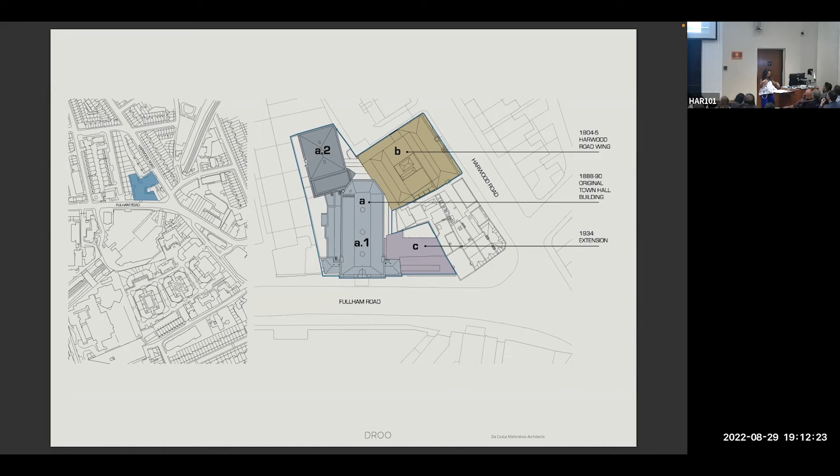It's entirely listed, so grade 2 star, which is actually a level up from the previous project. It has great historical prominence, and it stands as an example of late Victorian and Edwardian architecture. A large number of the architectural features and artifacts are also entirely listed. So in some cases that might be like a light or a handle or a sign that you can't touch. Effectively, you tiptoe around this building, terrified that something will fall down and you'll be responsible.

The history of the building is such that it has accommodated a variety of functional requirements and has been developed in response to various site restrictions. And this has resulted in the characteristic changes. So it has the various ages that are significantly noticeable. The volume and level of ornamentation can be seen within the overall structure and a complex circulation system throughout the building.

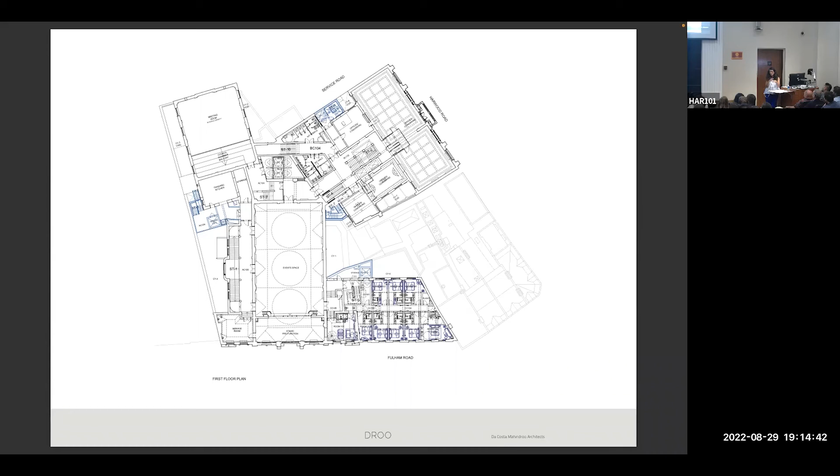Some wonderfully ugly plans and some very big important rooms. These rooms are a series of big events. The rooms have a hierarchy and they're positioned for their size in proportion to the facade, to access to the street, light, mass, and centrality. And then they filled the gaps between them with whatever shaped corridors they needed in order to make sure that space would be connected.

And they also come with this philosophy of exuberance. It's an exuberance of eclectic styles that allow you to deal with an odd shaped corner. If something doesn't align right, you put a column in front of it, or you decorate it with a little bit of frill. You paint it a bit brighter, and it allows you to get away with just about anything in terms of space. That process of connecting and stitching, a sort of quilting, is what's guiding our work.

So our work is currently ongoing. I don't have a complete project to show you, but it's something that is entirely without form. It's sort of an exercise in interior urbanism in a way, a sort of promenade through events. The particularities of the Fulham Town Hall would completely resist a formal synthesis.

So we are having to stitch parts of extensions to find that financial viability into the building. And as with most developers, you have to sort of squeeze it into wherever you can that makes sense for the historical fabric. So we're sort of performing a surgery in a way, and adding bits of new building inside the crevices between the existing one. The architectural challenge was to reveal a grand but introverted building beyond two ostentatious facades on Fulham Road and Harwood Road.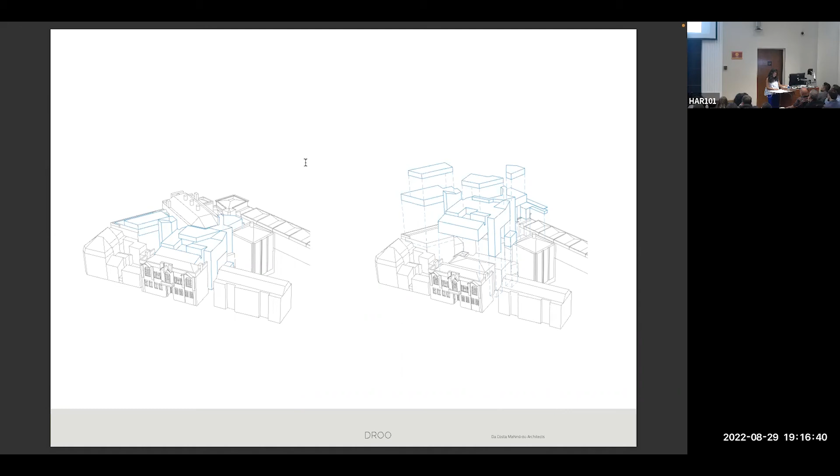And due to its historical intricacies and richness of spaces, the details are often hidden to public view. So some of the challenges that we've faced is every time we've sent a surveyor to survey the existing building, they've forgotten significant sections. They've left out a staircase or forgotten an entire window which might have been boarded up, which means that we're constantly discovering as we work.

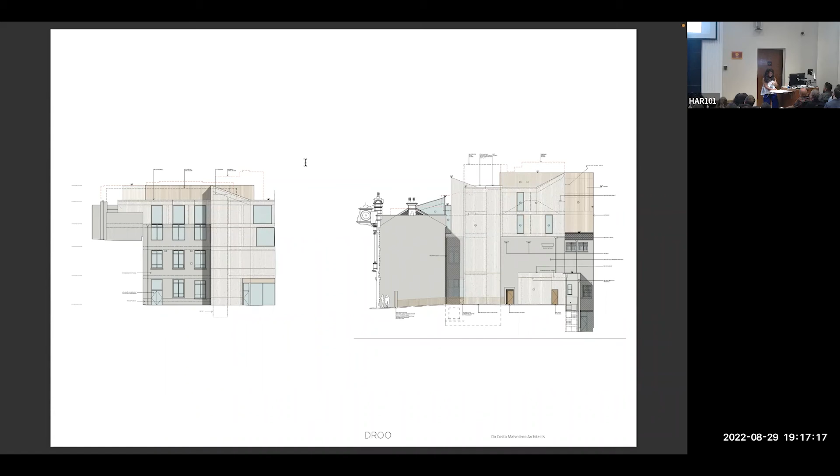Because of that complexity, we decided to play with this idea of a volumetric echopraxia, where every contemporary addition tries to mirror the tumultuous and secret roofscapes inside the listed building. There are a series of textured white volumes which kind of emerge, and we can hide parts of our architecture.

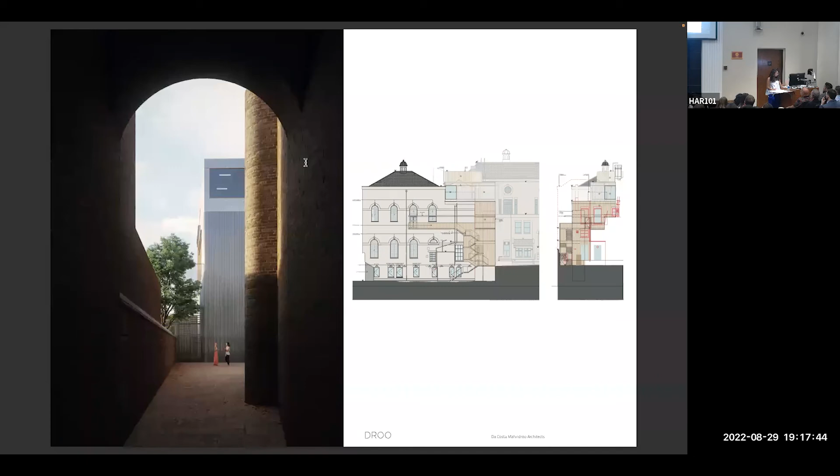It will almost not be visible from the street. It will only be seen from a particular angle, from a window in a particular room. And it's creating a series of secret interventions, which are more like a series of installations. So as the roof goes up in one corner, you might see it visibly from another. And it's reinterpreting some of that white terrazzo in a series of new composite terrazzos.

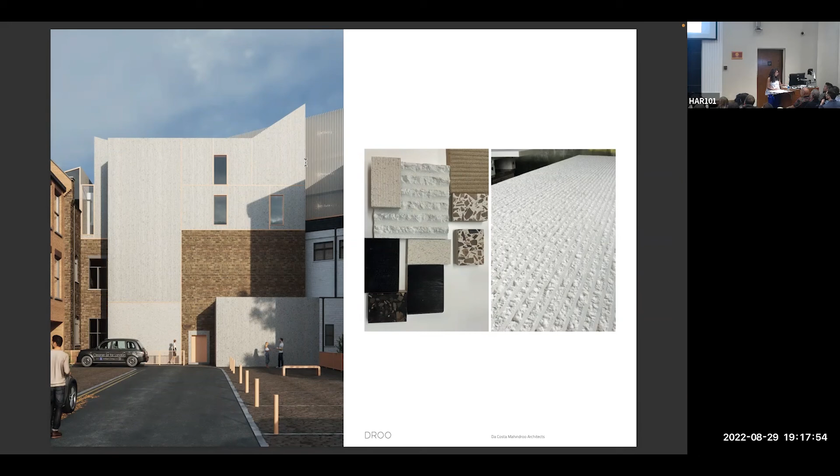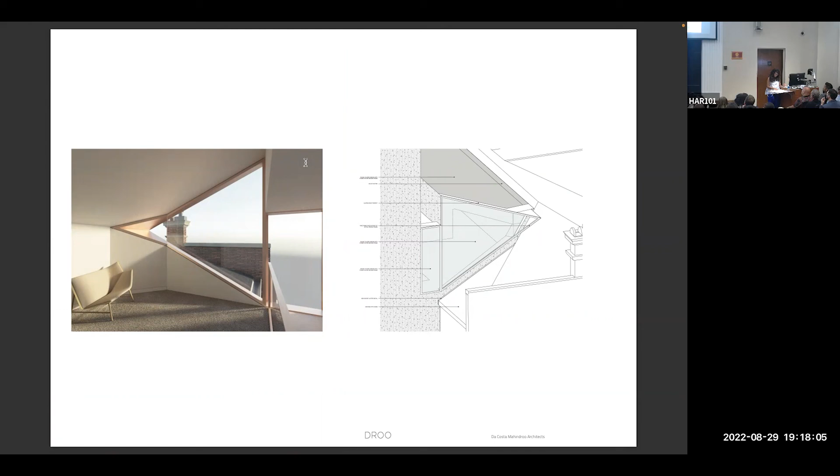So as you see here from some of the rooms, you'll be able to see roofscapes or stone chimney work, which will otherwise not be visible. And then through some inserted circulation spaces, you'll be able to discover parts of a facade which is visible from the opposite side of the building. So you experience it as a stained glass window from the interior, and then you'll experience that same space up close from the exterior. So it's a process of revealing a building, which in some areas would not be visible.

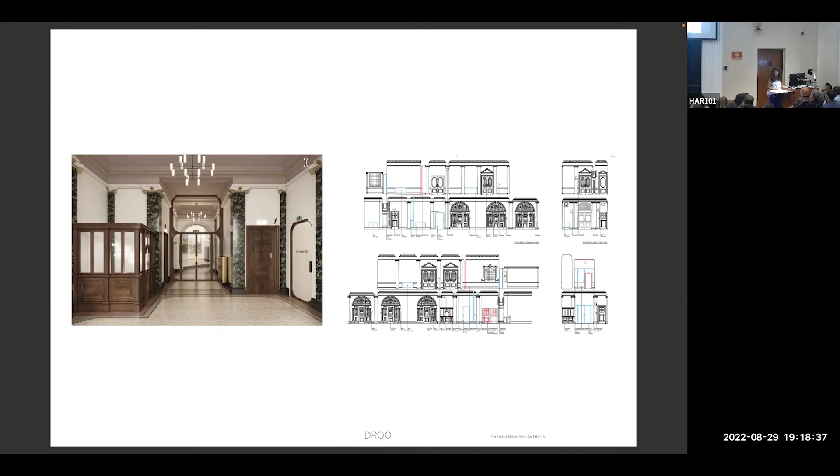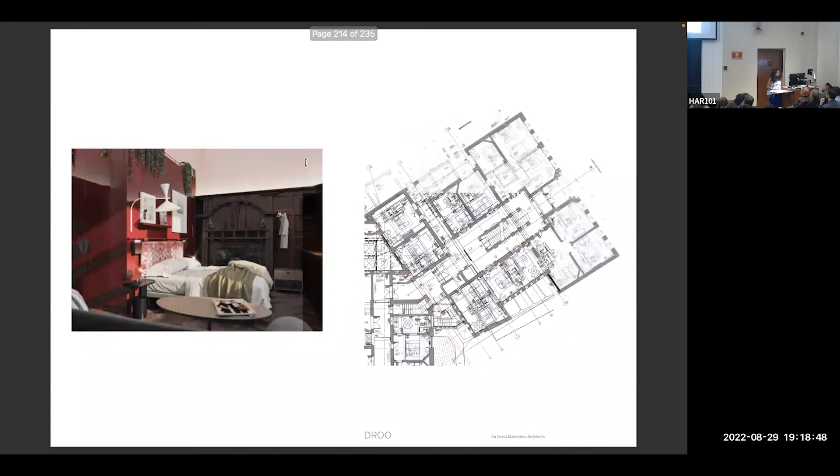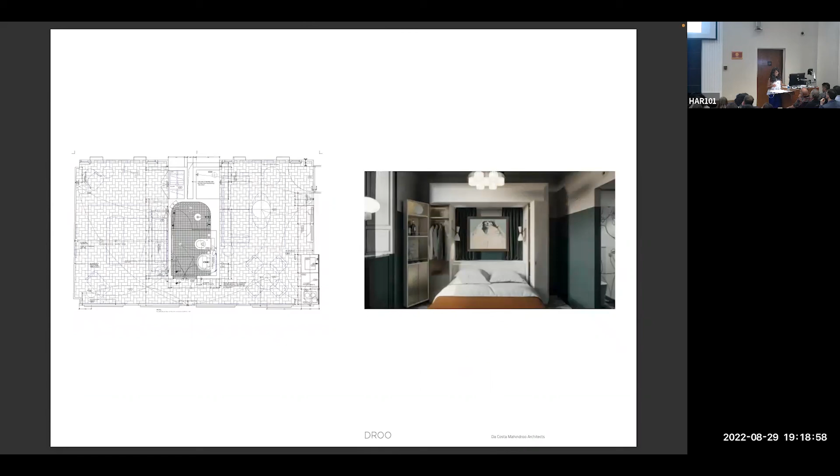Sometimes our work is just surgical insertion of fire doors, for example, but doing that with a sensitivity to the existing fabric. So finding ways of creating geometries that actually work with the existing fabric of the building. And in other cases, it's returning to that idea of the furniture pods. So the room that is spatial furniture and effectively built entirely free of its walls. And in this particular case, reinterpreting some of that relief tiling in new ways so that we can create new typologies of space, but that reference the history of the building.

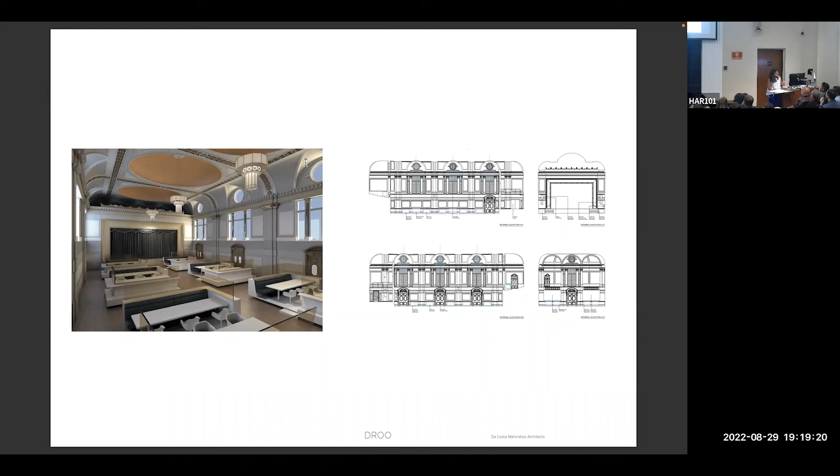A number of the larger rooms will be converted into restaurants and other public functions. And today, these rooms are being used as exhibition spaces, as a test drive for future exhibition spaces, so that they can generate some awareness about the building within the community, and they have access to it in its current state, and so that it can kind of prep the ground for what comes next.

I think the project seeks to revive a local icon. We've just received the planning permit on this and the listed consent. We had an overwhelming amount of support because the building has been shut for almost 15 years, I think, as well. And that is something that is consistently done through engagement for us.

You don't gain support for projects like this without spending an immense amount of time with the community, without speaking to people who live within those streets, who are the neighbors, people who have been using these buildings for a long time for their own purposes, and people who have established a relationship to this and who for the most part will feel like this is going to change that neighborhood and not in a good way.

And that support is something that we really fight for. We spend an immense amount of time with the communities trying to create a sense of ownership for them, which is where I'm going to finish. So most lectures close on the most significant success of a practice, but I'm going to end on one of our most important failures. Our team with Heneghan Peng architects were recently amongst the finalists for the International Slavery Museum in Liverpool earlier this year.

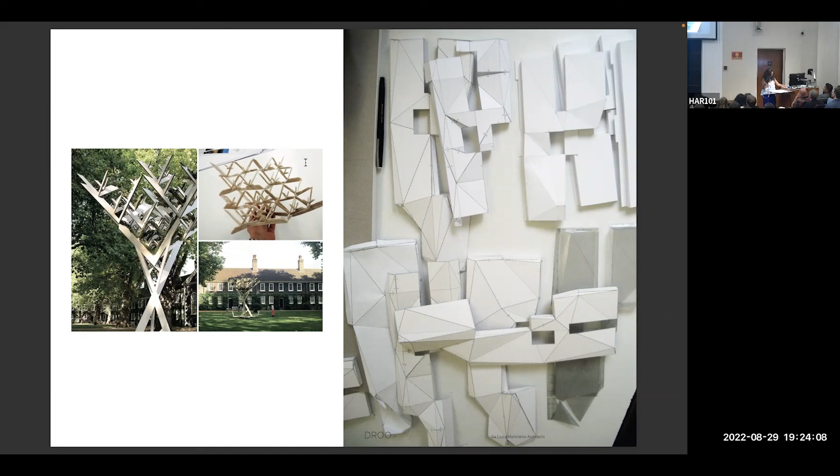Our work is engaged, however, it isn't journalistic. It isn't holding up a mirror to the news of the day. That news is too fleeting to maintain pace with the painfully slow process of realizing architecture. It's slow to build and it's slow to disappear. For every project we realize, there is a litany of work that never sees the light of day. Many people who practice feel the same way. Whilst a film or a book can be put within the historical context in which it was written, buildings often have to transcend their historical contexts. They have many shifts in perception, and the longer they last, the longer they have to adapt to behaviors and programs. If our work relies on being interesting solely because of its programming, then how is it going to be interesting when that program leaves?

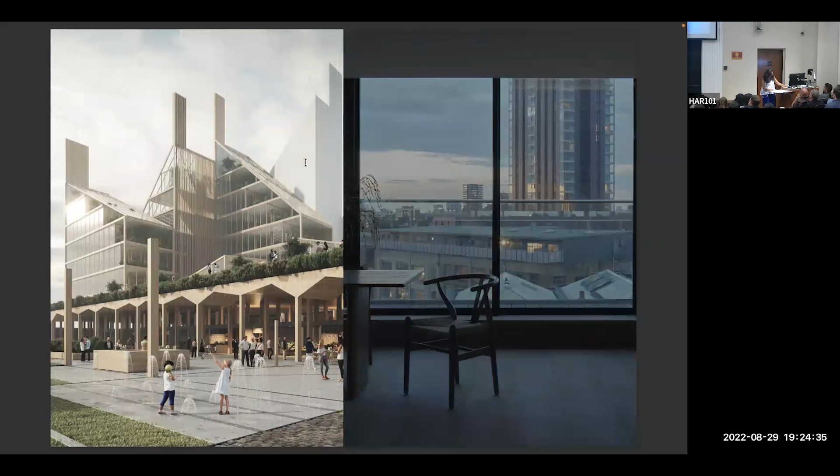As many of our projects have tried to demonstrate, the most robust architectural contributions that we've made are those that have the potential, the heterogeneity of offering of scale and typology in proportion and frequency of openings, light to mass, literally windows and mass, are the only ways that we allow the programs to change over time. Buildings which are conceptually and tectonically strong enough to be given value, to be retained. Buildings which will change beyond the reasons for which they were conceived, but will hopefully be respected for their design intent in much the same way that we respect the work of those we refit.

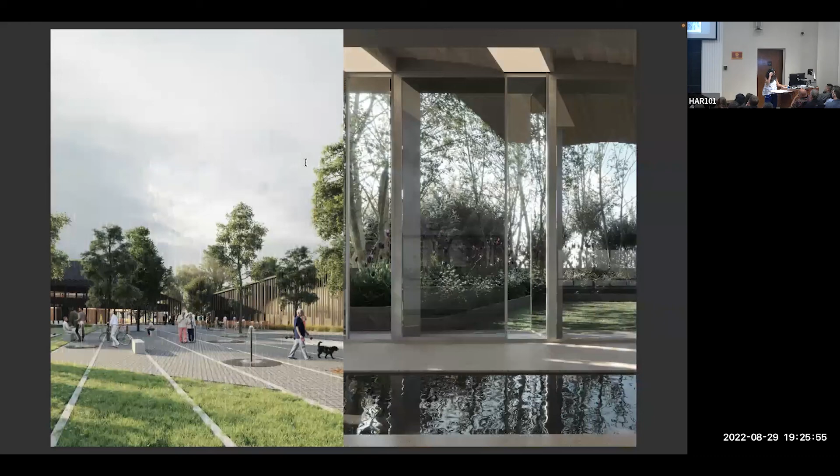I think architecture needs to exist first as a cultural medium which observes and embraces our complexity. It builds on our history for all of its warts, engages with the world around us for what it is, but not only as a mass of problems to be solved. And is a canvas to the evolving social and political stage, because it is going to change. It changes too fast. And for it to be relevant, it has to be an active canvas, but not because of the polemics that surround its conception. It needs to be active through its material means. Powerful because of the semiotics people can attach to it with time, and because it moves us at a much more fundamental corporeal level.